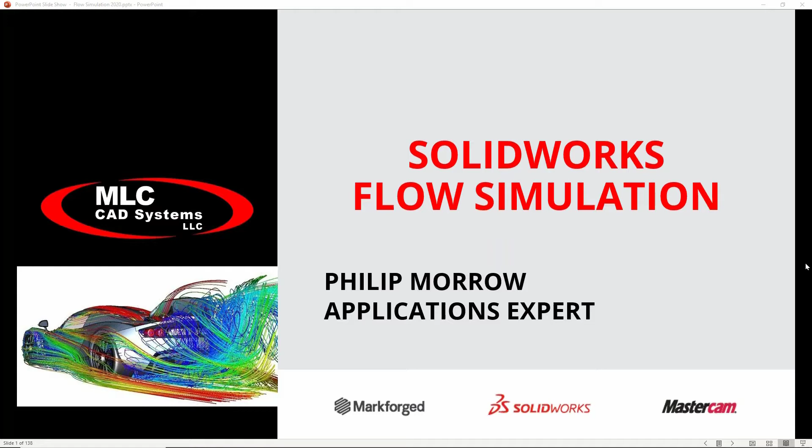I'm going to start off with some introductions for those of you who don't know who I am. If you don't, I hope you would by now, but if not, I hope you get to know me soon. My name's Philip Morrow. I'm an applications expert here at MLC CAD Systems. I've been doing this for a little over 7 years. My background is in mechanical engineering. I worked in the defense contracting industry and in a CNC machine shop before I came over to MLC.

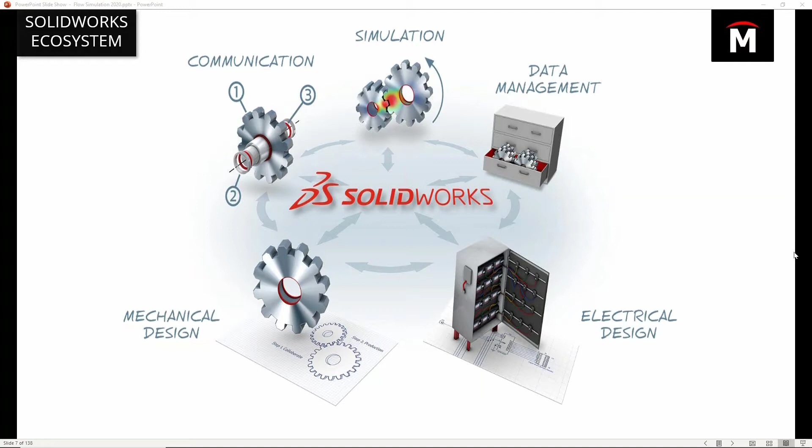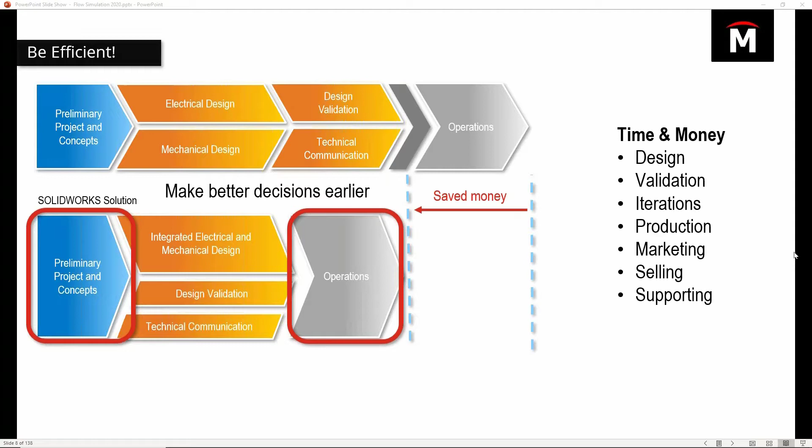It's also built inside of SOLIDWORKS, so it has the same interface. So when you think of a sim product here, or really anything with the SOLIDWORKS brand on it, the idea is to get more of these processes to work in parallel. Not just the data management, the messy multiple files and revisions, but as soon as somebody creates a shape, well, I can start a flow simulation with that geometry. We can use configurations on it if we need to, and so if there's a change in the design, I know it's time to just rerun the flow simulation, and that's what we're talking about.

So let's get to the actual software and what this thing actually is. This is a general purpose computational fluid dynamics tool, or what you're going to see a lot as CFD. Right, and in CFD, we're always coupled with heat transfer. So it's always doing convection heat transfer, even if you don't need it, that's in there.

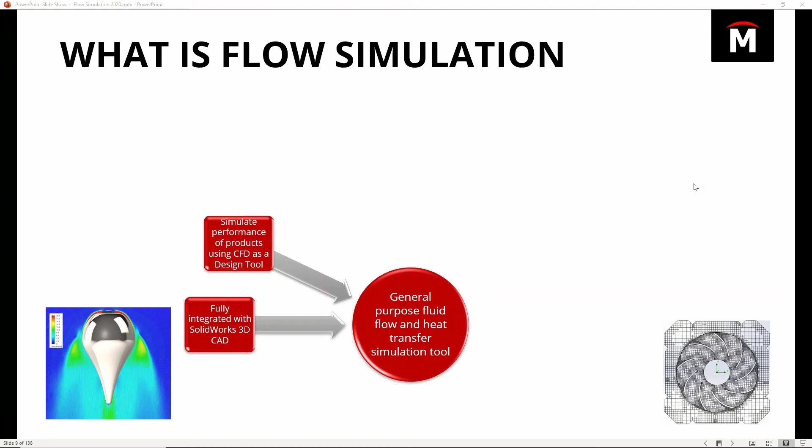And this is built inside of SOLIDWORKS. So you need a SOLIDWORKS license to run this, but it just runs as an add-in with the same interface, the same right-click menus that you're used to. The idea then is you can use this as a design tool. You can use it to simulate performance, optimize performance, and compare designs side by side. That's really where the sweet spot for this is.

It does not matter if you're talking about internal flows, external flows, or both happening at the same time. In fact, you could run compressible and incompressible fluids, even non-Newtonian fluids in here. So your slurries, your bloods, your different materials that act in these strange behaviors, not a problem. This software runs the K epsilon model for turbulence, meaning we don't need to specify where we have laminar flow or where things are transitioning. Really, it can handle all of that by itself.

And I mentioned it was a heat transfer tool for some different reasons I'm going to talk about. Flow simulation, or CFD, computational fluid dynamics, is the best place to do heat transfer solutions, whether that's conduction, radiation, or just convection, which is always being solved. And for those of you who know SOLIDWORKS Simulation, without the word flow in there, that's our finite element analysis, our stress and deflection software that's also built in. These two products work together, they're coupled.

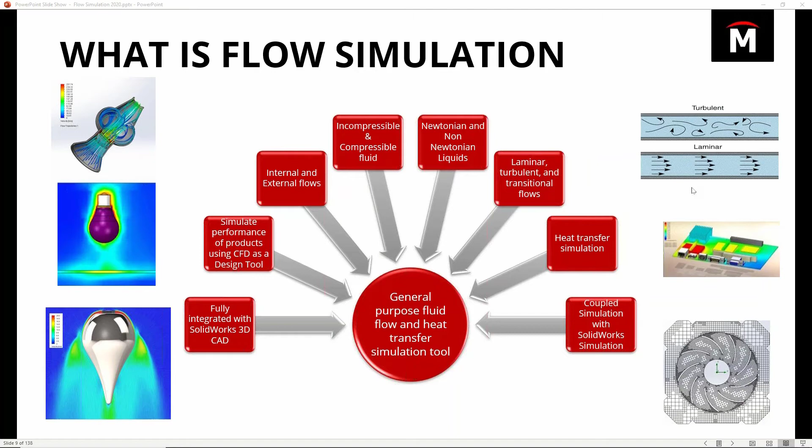So let's say you run a flow simulation and you've determined a pressure distribution on something outside in the wind, or a temperature distribution, and things are going to expand as they heat up. Well, you can take those results and use them as an input over in SOLIDWORKS Simulation and calculate those deflections due to the wind loading and those stresses due to thermal expansion. So as you'd expect, the tools work together.

This also means over the 7 years I've been here, I've seen them in a lot of applications, and I've seen the product grow. You guys know SOLIDWORKS, every major release comes out with 250 enhancements just to CAD. Well, this stuff happens with Sim as well. The release is a little later, so you might have missed some of these really cool capabilities that came in, because they actually show up usually around the February timeframe.

One of them you definitely should know about is optimization. Whether that's just a what-if side-by-side comparison or like a multivariable design of experiments, you can use this software to optimize towards a goal. Let's say, what length of pipe do I need to achieve this pressure drop? Well, we can have the software figure that out for us.

You can also do solution adaptive meshing here. That's the ability to pause the solve and have the software increase the mesh density in areas where there's high rates of change and high gradients, basically just giving you a more accurate solution and a more efficient mesh. It's really something you couldn't do manually, something you want the software to do for you.

Additionally, a sliding mesh capability has come in. This is perfect for rotating geometries, to actually spin those mesh cells, which are representing impellers and fan blades and wind turbine blades. And another really cool one, you definitely see this across our YouTube channel a bit, free surface. That's the interface between two fluids that can't mix. So we're talking oil and water, water and air. You want to see waves sloshing on top of a tank, that can definitely be done in here as a transient time-dependent study.

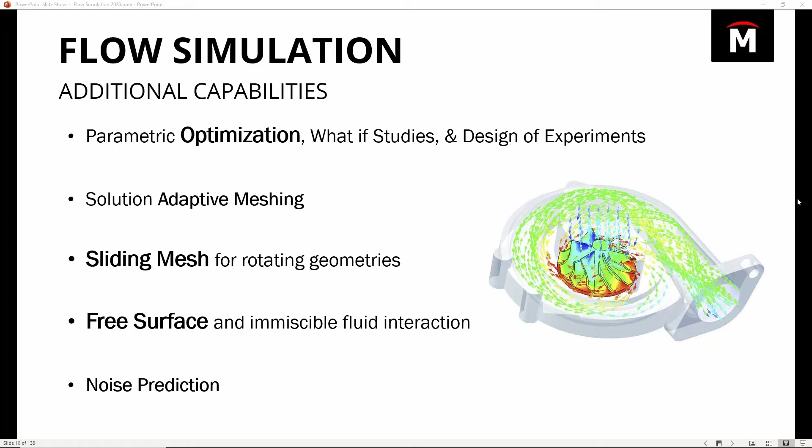Finally, we're doing pressure plots as well. So of course you can do noise prediction in decibels. Pretty cool if you're doing something like a Flowmaster exhaust, or how about a suppressor? Great place to design those types of things. So yeah, the use of this software is far and wide, right?

When I think, okay, I'm going to show today some flow simulation, some hands-on with the software, I'm thinking, okay, what do I want to show you guys? This could just be pressure chambers. It could be spinning and rotating things like the hairdryer model. It could be lighting applications, especially for high temp things like radiation, halogen lights, or just LED housings, or air conditioners, and we're running like humidity models and figuring out comfort parameters.

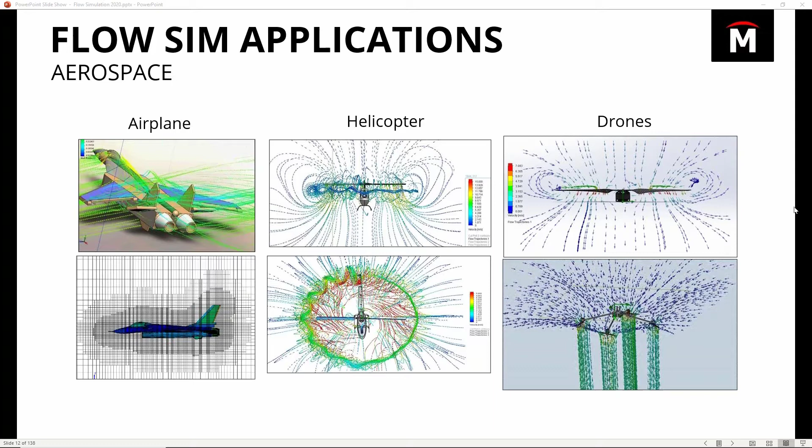Really, the origins of this code, when it first started to be written back in the late 80s, this was for rocket nozzle design. For high Mach number flow was the original stuff. So drag forces, boundary layer skin effects, aircraft design is a perfect place to be. And that kind of goes into automotive stuff. Of course, drag forces for race cars.

We have NASCAR teams, the US bobsled team that uses this program. Sloshing inside of a diesel tank, which you could see on our YouTube channel. Or those comfort parameters I mentioned again to figure out how effective could your HVAC system be. And then there's some niche things as well. Porous media effects could be used for air filtration systems, catalytic converters, or figuring out exhaust manifolds as well.

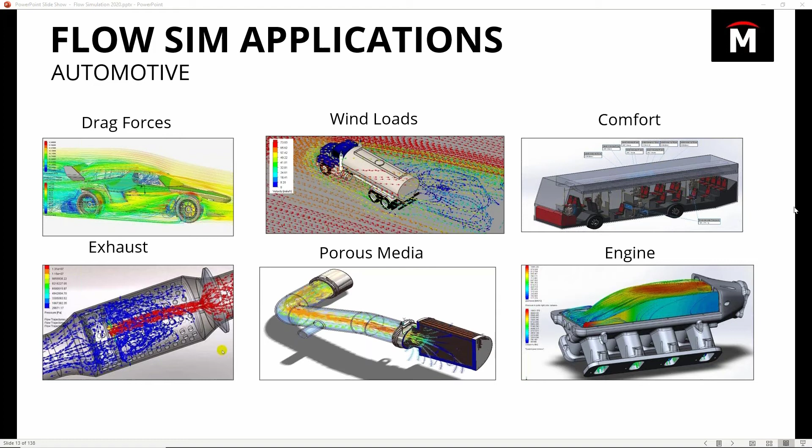So I've got a lot of stuff to choose from when I get to talk about flow simulation. It's like the coolest simulation software that SOLIDWORKS puts out, I think, because it's so far-reaching and the visuals that come out of it are just awesome. So I'll tell you why I see it used most in my area, and our customers that are here in Austin, Texas. And the first one is just figuring out the airflow dynamics, which are often counterintuitive or have some kind of physical phenomena like the Coanda effect or something going on that we wouldn't have guessed if we just built it and prototyped it.

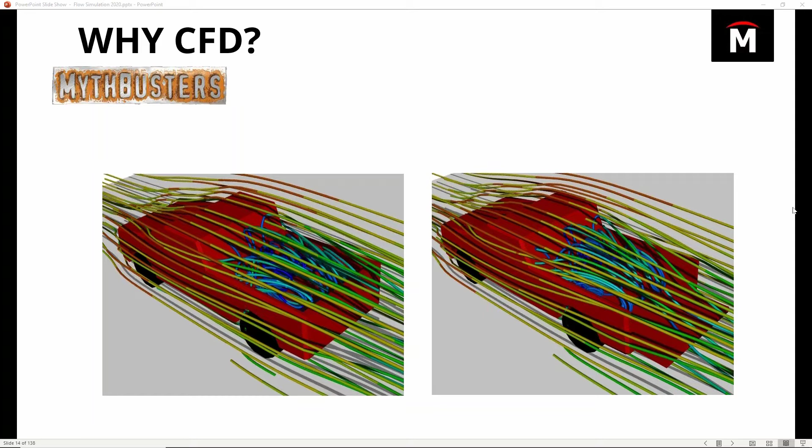A common example I use is the old, is my truck going to be more fuel efficient on the highway if I've got the tailgate up or tailgate down? To me, it feels like the tailgate down would be the way to go. We maybe have less drag than that vertical tailgate back there. But really, it's not the case. It's the opposite.

What you find out when you run this in Flow Sim or in a wind tunnel is that you get a stagnation of vortexing air in the bed of the truck. This works as what's called a virtual body. Because it just sits there, it allows the rest of the air to flow over that virtual body and just stream over the top, basically reducing the drag force. Sometimes stuff like this happens, even inducing turbulence. The bumps on a golf ball can be counterintuitive. So definitely the first reason I see this used.

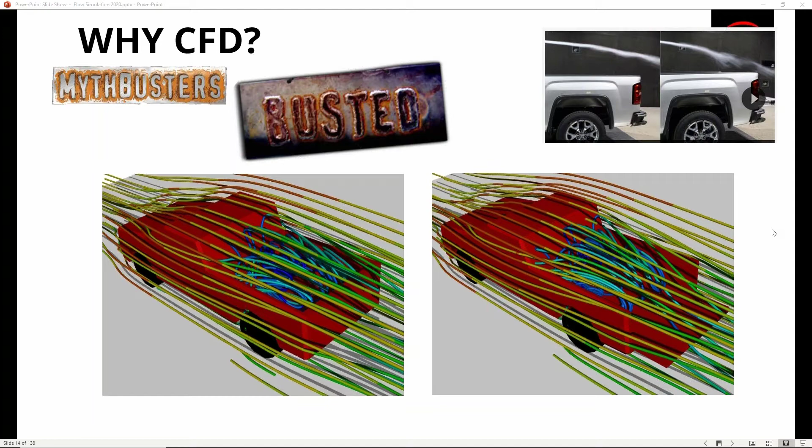But the second big one is thermal analysis. This could be for large industrial applications, but I see it a lot in tiny electronic devices that maybe have forced convection, maybe have free convection, but have a lot of little components that are heating up that would be difficult to mesh in a traditional finite element analysis program.

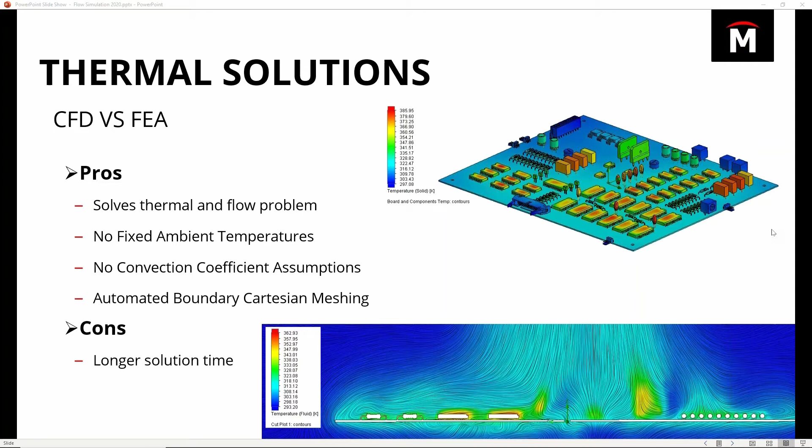And because we don't have to make the same assumptions over in flow simulation, we don't have to have fixed ambient temperatures. We don't tell it the rates of convection. It calculates these things. But the only downside maybe is that the solves are a little bit longer because we're getting more information out of it. So with those two ideas in mind, I thought I would show you guys today two different scenarios. I know I'm talking a little fast because I want to show you both of these.

The first would be an exhaust recirculation. Sometimes you see these called preheaters, right? We take exhaust off of one thing, bleed it into the incoming air of another. And of course, it's really important that that exhaust comes in evenly mixed since you're kind of polluting the air downstream just to warm it up. So we want to see, could we make some changes to this design, or how good is it at mixing in that hot exhaust into a new stream of air?

And then, of course, electronics cooling. I've got a model here that uses just free convection, some heat generated by LEDs, and just take a look at one way that we might solve that using external analysis in the software. So those are my two thoughts for today. Let's start first with the exhaust recirculation manifold.

This one has just a few components, and I can show you completely the setup of it because that's the first step here, right? Let's just take our CAD model and set up the experiment that we're going with on the exact same model. You can make another configuration if you need to, but you could just work in the same assembly that you've got right now. With flow simulation, there is little to no need to do a bunch of geometry simplification. You can just get going. So here's the product I'm gonna work with here.

What I've got is on the right side, just open to the atmosphere, and on the left side I've got inside of this gray component an exhaust gas coming in hot, and I know the mass flow rate of it. On the bottom left side of this gold component, I've got air coming in at 40 degrees C, a little warm, and I know the mass flow rate of that as well.

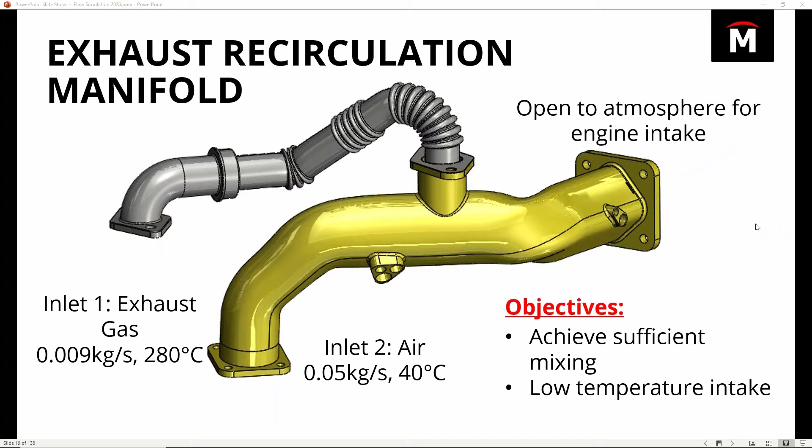So I want to achieve some sufficient mixing here and see what these temperatures are going to be at the exit as well. Now, I do this in Flow Simulation with a wizard. This is the only software where I use a wizard every time. I know the software well, and I still use the wizard every time. So let's flip over and I'll show you what this looks like.

Here in SOLIDWORKS, I've got my assembly open. It's just a regular assembly you deal with. The only difference here is that I've made the assembly semi-transparent, and I've actually capped off the openings. I did this to make an internal flow. There's some Flow Sim tools to automate lid creation—click a face, and I've got those things capped off, ready to start a flow simulation.

Now, you guys see already that the interface is the same, right? I've got a command manager on top, and I've got a Flow Simulation tab. It is added into the software, and I'm just going to launch the wizard straight off of that.

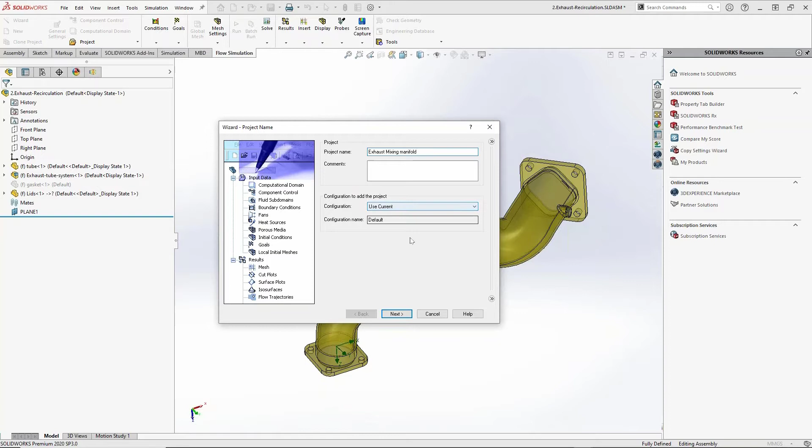So the wizard will help me set up this project. I can give it a name like exhaust mixing manifold. I'm going to use just the current configuration, but these are configuration specific, which is very handy. Then I'll pick a system of units—you're going to find anything you want here. I'm just going to change the temperature to Celsius, and of course you can save this so you never have to do that twice.

Now let's set this thing up a little bit. This is an internal analysis. I don't have any hollow cavities in there, so really I just need that. I'm not going to do heat conduction this time, but here's where I'm turning on more equations for the solver. The less things I check, the faster it'll solve. This thing is dominated by flow—gravity is not even going to be that important because we don't have natural convection.

So really, I'm just going to run internal analysis. I know convection and all my flow velocities and pressures are solved. So that's it, I'll just hit next.

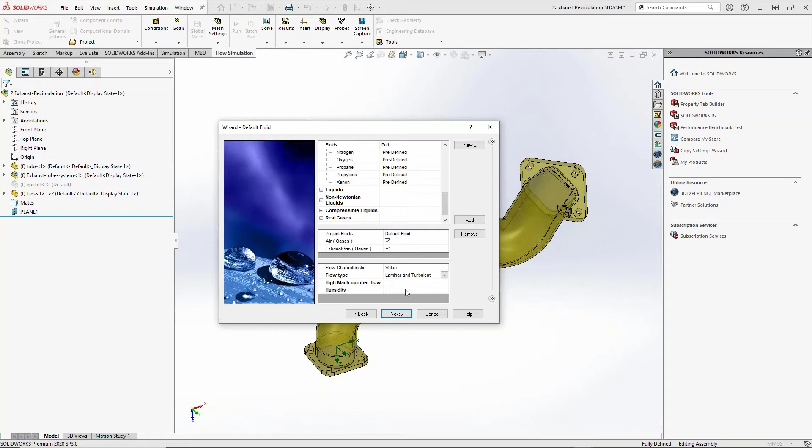Now, depending on what I chose there, I need to tell it what the defaults are—what's everything going to start with? I've got air in this analysis, so I'll open gases and add air. I've also added another gas of my own here to represent exhaust. You can add any custom materials you want. So these two fluids are going to be in my project, and I'm adding both of those. Because I chose gases, I've got some extra options if I needed them, like running a humidity model or high Mach number flows, but I don't need to add those equations here, so I'll just hit next again.

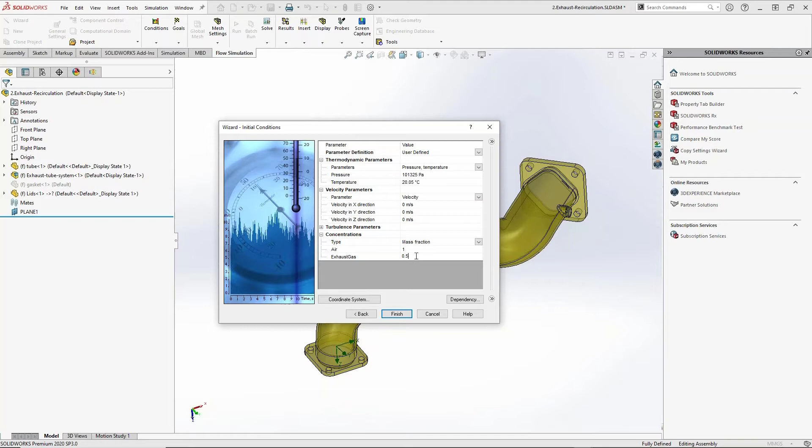Default wall conditions make sense to me—the only way heat's getting in or out is by the entrance and exit that I tell it. We have a no-slip at the wall assumption. You'll notice I'm not making many changes in this wizard, am I? The only thing you really need to know is to answer the questions for what you need, and everything here becomes the default for your initial conditions. For instance, I've got a concentration section—let's say, hey, initially everything is 100% air, unless I tell it otherwise. That'll become the default, and I'll just hit finish.

All right, so that wizard, I use it every time. You add the things you want to know about and what's going to be in here as an overall default, and then you've got some starting conditions to deal with. Pretty simple—I never skip it.

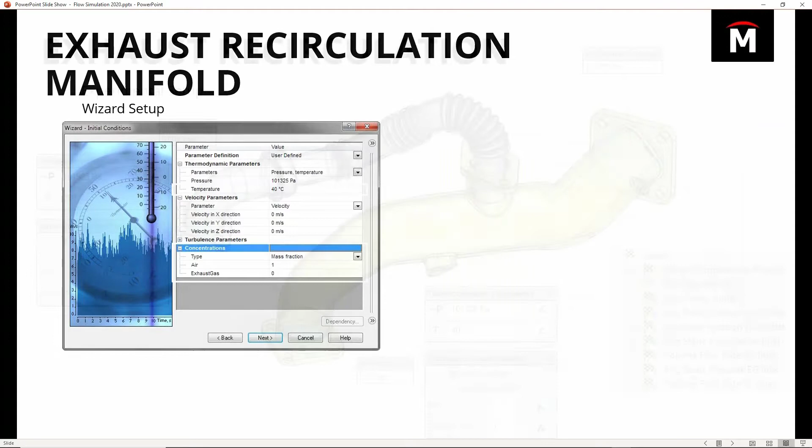But now we get to the individual stuff. Now we need to go around and tell it what are my ins and outs and what's different from the wizard. For instance, I know I've got an inlet mass flow here of 0.009 kilograms per second at 280 C. How do we set that up? Well, Flow Simulation made a new tree—here it is.

It's got my exhaust mixing manifold, got my simulation set up. If you use SOLIDWORKS, you definitely know how to use trees. It also created a computational domain for me, that's that cube you see. So it recognized the volume that I'm working in. I could use this to specify some symmetry if I needed to, but I'm just going to hide it because it looks good.

My ins and outs are what's called boundary conditions. So I'm going to insert a boundary condition, and I'm simply going to choose the inlet face. Here I'm going to use a quick select other to get the inside face of that lid that I made, because what I know is an inlet mass flow rate of 0.009.

And then there's a lot of other buttons and things in here, a whole bunch of stuff. I mean, I could go to the help file and read what all this stuff is, but all this stuff is just going to be as I said it was in the wizard.

So I said everything was air. If I expand substance concentrations, it says this is 100% air. Well, I'm going to switch that so it's 100% exhaust. And if I look at the thermodynamic parameters, it's the room temperature that I left in the wizard. I'm going to make that 280 degrees C.

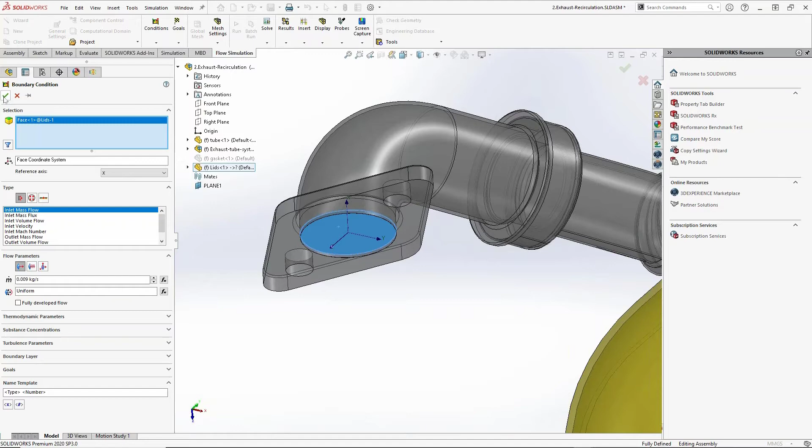So if you forget something, if you don't know what to put down here, don't worry about it. It's just going to be what was in the wizard. And then one green check, and I've got my inlet.

Similar thing is happening over here with air. If I quickly flip back to our experimental setup, looks like I've got air coming in at 40 degrees C and 0.05. So I'm going to insert another mass flow rate coming in, 0.05.

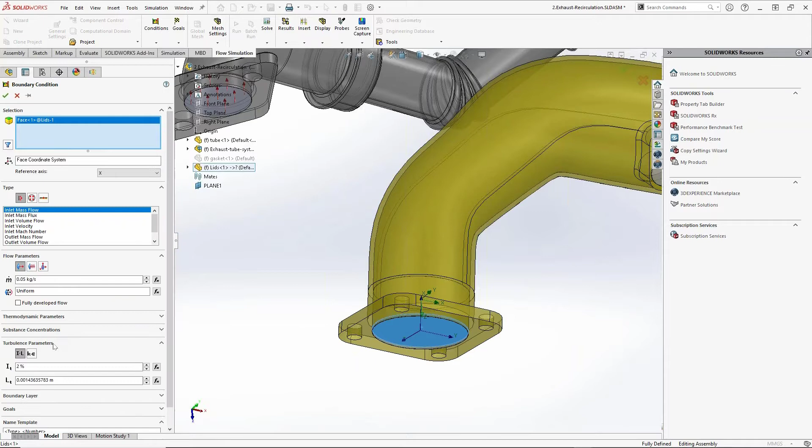I'll just grab the face that air comes into the system at. And really, I don't need to change the substance concentrations, anything else here. I can make it a little warmer, it comes in at 40 degrees C.

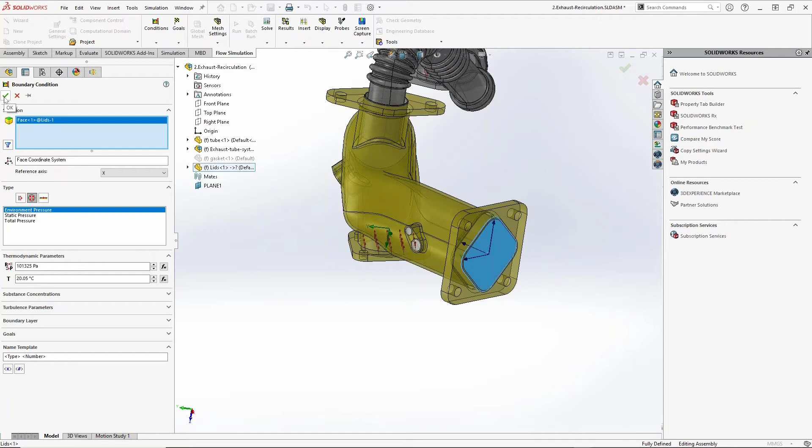All right, that's pretty good. And how about the outlet? That one's probably the easiest boundary condition, because now instead of a known inlet flow rate or an inlet velocity, I can just say this is a pressure opening. This is just open to the environment. So it's just going to spill out into air that's at 1 atmosphere and room temp. So that's my exit over there. Not too complex to figure out the ins and outs of this entire system.

Now there's one thing over here in my experimental setup on the right that I could skip, but you really shouldn't. These are goals. What are you looking for in this? By specifying goals, you're going to get those outlet numbers just delivered to you. So it's great for post-processing, but it also helps us check the accuracy, right? We got a garbage in, garbage out scenario. I want to make sure that the numbers coming out are what I expected, that I set things up right.

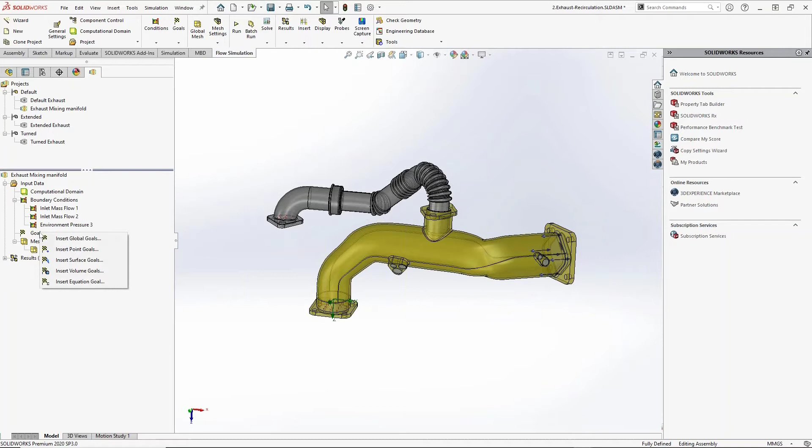So I'm just going to right click on goals. You can do these per body, per specific surface. Maybe I'll just say globally, let's find out here. And you get a whole list of stuff you can use. Let's say globally, I want to know what the average fluid temperature is. And I'm just going to create that goal.

So that'll be monitored during the solver. The solver will know that's something it needs to be particularly accurate about. Plus, I get the hard numbers out as a result from this thing, which is going to be super nice.

At this point, I'm actually ready to run this thing. I went through the wizard. I specified how things come in and out of my model. I set up a goal that I'm interested in. There is a section here on meshing, but honestly, this is very simple geometry.

A couple tubes, they don't change much in diameter. The mesh it comes out with is going to be fine. And if you're really interested in the details of meshing too, well, that's what we spend about half our training class over. So definitely let us know about that.

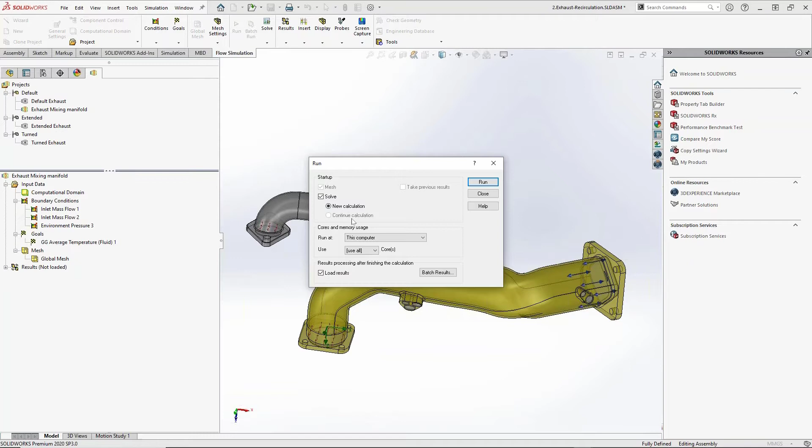One thing I want to point out is if I run this right now, I can leave a couple of CPUs open on my computer to do other things with. And I can pick up old calculations and continue ones that I stopped and left off. So I mentioned that when you're running one of these, it might take a little longer than FEA. Well, that's okay.

You can actually pause one of these and come back to it later. You could leave yourself some CPU available, so you can go on Google Chrome, whatever you need during the day. You can even offload this to a slave computer and just have it run on your coworker's machine, and they can wonder why their CPU is running so hard. So, I mean, that's simply it.

Set up an experiment using the wizard, your ins and outs, and hit run. You guys all know how to use a tree, and you know how to use that right-click button inside of SOLIDWORKS.

You're going to be able to get one of these running. In fact, I did something here that you really don't see done in web demonstrations of software. I actually hit run on this model so that it's cranking up right now, and it's loading all those things that I set up into these big math equations, preparing that. Then it's going to mesh the model, break it down to those cells, and start solving.

The reason I hit run and decided to do that here live is because I wanted you guys to see this solver window. Everyone kind of knows that flow sims, CFDs take a little longer to run, but I'm just running this on my Lenovo laptop.

And I've already mentioned that you could save yourself some CPUs, or you could stop one of these and pick it up later. But you also get real-time feedback as you're solving these things. So what if your setup was a lot more complicated?

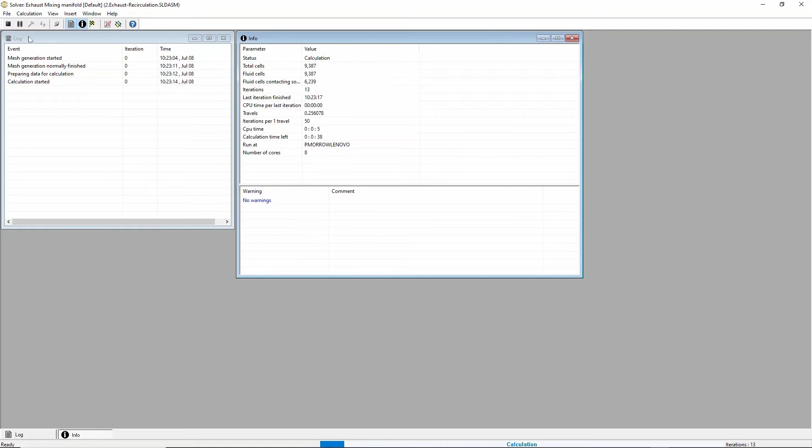Well, in something like this, it's already solving here. I'm actually going to pause it. I can see what's going on with the solving. Do I have any warnings I should know about? I could monitor that average temperature that I set up as a goal. I can see it's increasing.

And I could even watch cut plots of this model. So I could say, let's just pick a plane and watch, let's watch velocity, sure. And you can see there's my plane just kind of cuts through it in 3 different spots.

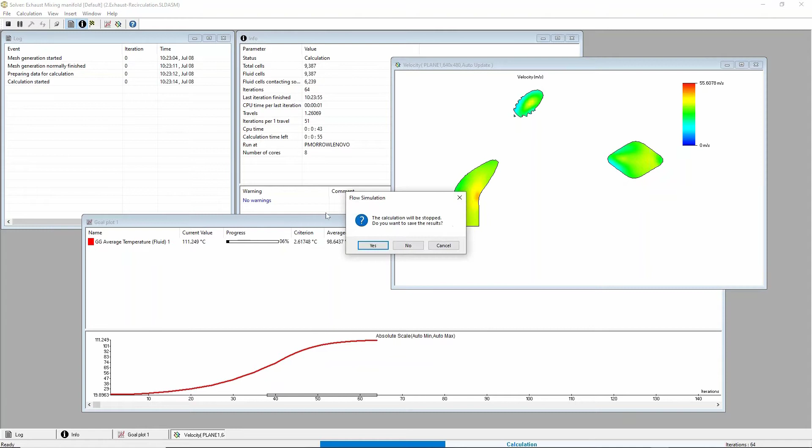And so if I unpause this, I can see things change from where they were at my initially all air-filled room temperature to as this flow starts to develop. So if you get something that goes the wrong direction, okay, I must have set something up wrong. I can go ahead and stop this and just go back in and make a change in the software and pick right back up from where I left off.

So don't worry about these long solve times. It's really a misnomer. You're going to get results out of it right away. Even while it's solving, I'm making cut plots. I can save animations of those, and I can get qualitative and quantitative results out of it.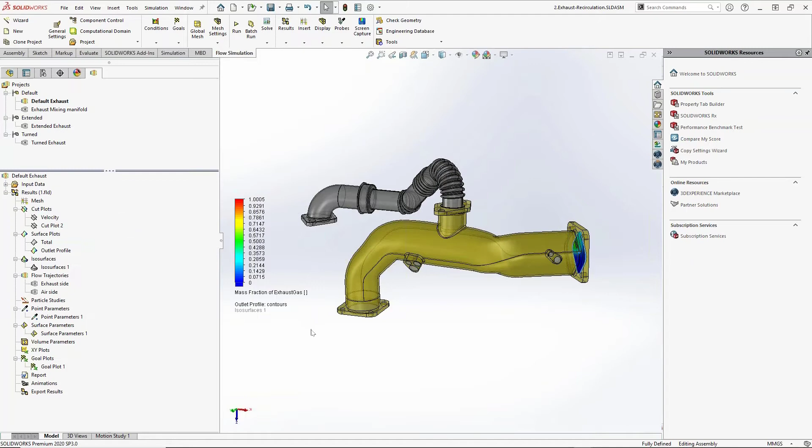Here I've got a surface plot showing the outlet profile by mass fraction of exhaust gas. And this is actually telling already. Even though we're qualitative, what I can see here is I've got a high mass fraction of exhaust gas just sitting on one side. So not very evenly distributed.

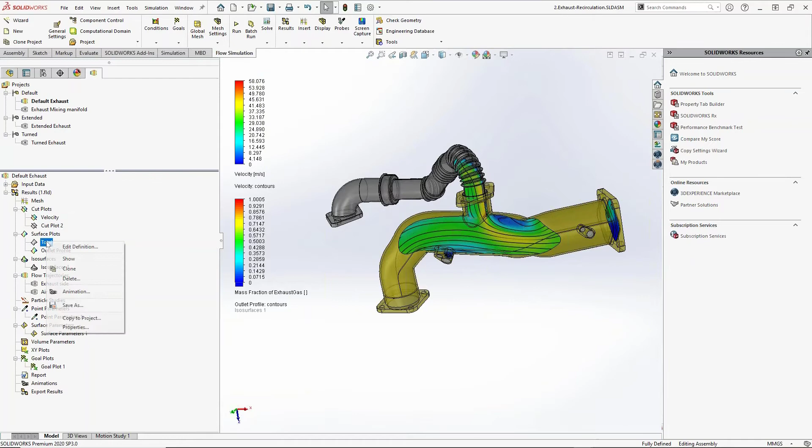I'm a big fan of moving through cut plots and surface plots first to really learn about what the flow behavior is. You're not going to miss anything here. And I can see, okay, my velocity's out here on the surface, and where I've got my mass distribution. How evenly is it flowing?

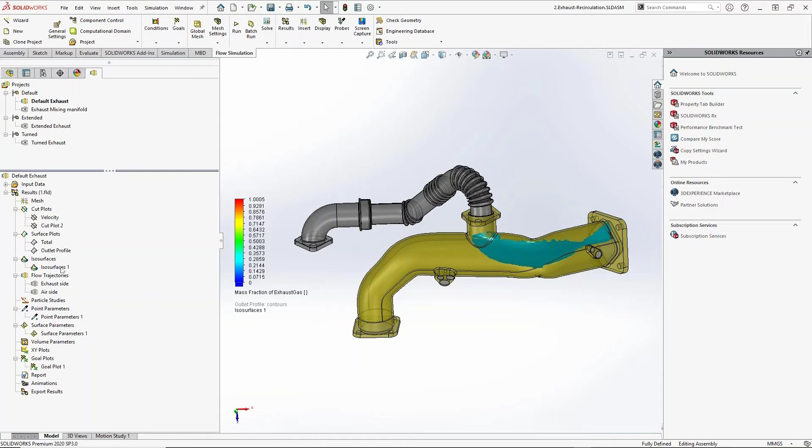After you go through some of these qualitative things just to learn about them, make sure you kind of understand that this is working the way you intended, and if there's any phenomena you didn't realize, then maybe set up some flow trajectories. Flow trajectories are a super cool way to explain the flow to other people.

And these have great animations where we can simply pick a face and say, hey, I want some arrows to move through this thing, maybe color them by mass fraction of exhaust gas as they are here. They're always going to move with the respective velocity, and they just make great animations that if you show them to anyone outside of engineering, they're immediately going to understand what this really means.

Of course, once you get through there, it's time for the hard data, right? To actually get some numbers out of here. And that's where the second half of this result tree comes in, where you start dealing with goal plots and volume parameters. I'm actually going to jump straight to a goal plot.

So I mentioned if you set up those goals earlier, you could see them immediately in Flow Simulation. Well, here, let's take a look at all the different goals. We're looking at mass fractions of air at the inlets and outlets. We're looking at a global goal for average temperature of the fluid. And if I just hit show, all these numbers show up right down here, so I can see what the answers are right away.

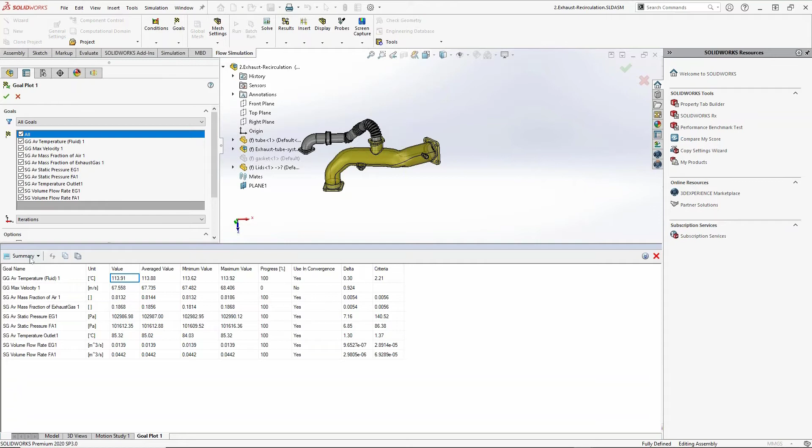I can see that average fluid temperature is above boiling point right here, and I can check out what their deviation is. You could also check out their convergence graph. So as this thing solved, was it still bouncing around, or did it converge and get me a good output given my input?

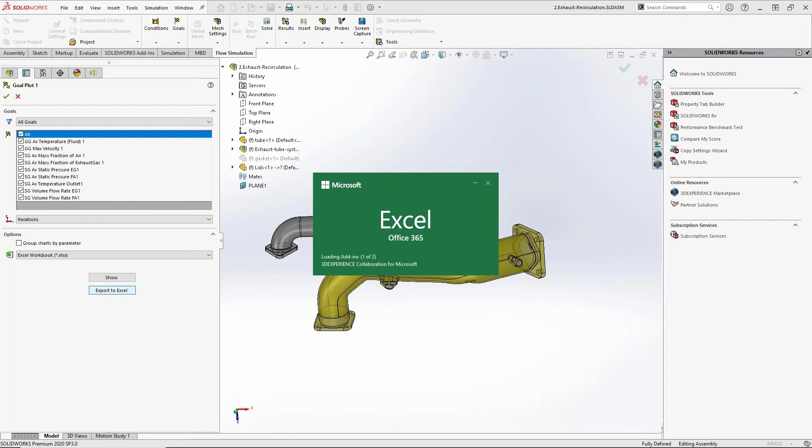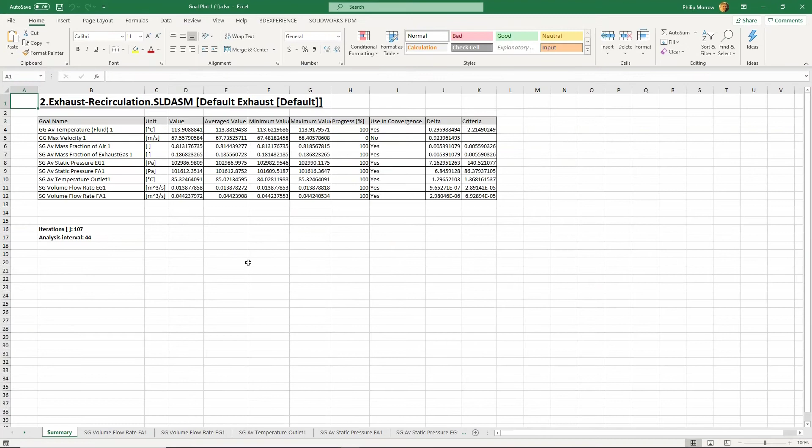So I get a nice sanity check on the efficiency and accuracy of my setup, plus I get the hard numbers. In fact, when it comes to hard numbers, if you just hit export to Excel, this takes a couple of seconds, and you're going to get all the hard data output to Microsoft Excel. Here it popped up for me. I've got that same table with more decimal places, plus all those nice convergence graph plots. And of course, if you go all the way down, you've got the hard data.

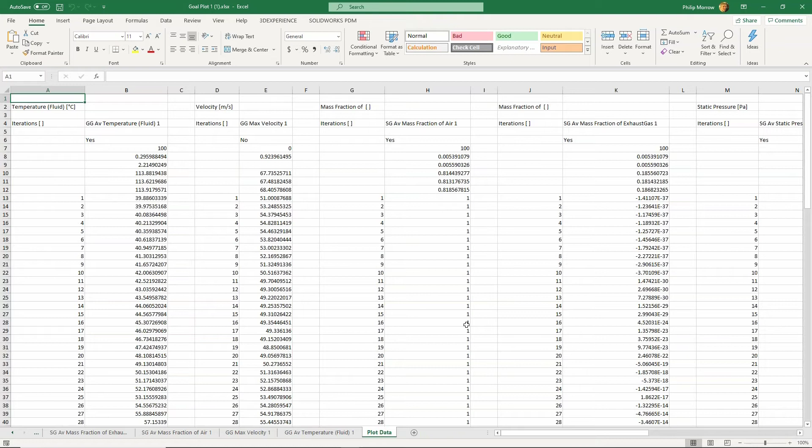So if you want to do some more unique visualization, it can be really nice for transient, time-dependent stuff. You've got that as well. There's even an animation suite down here at the bottom.

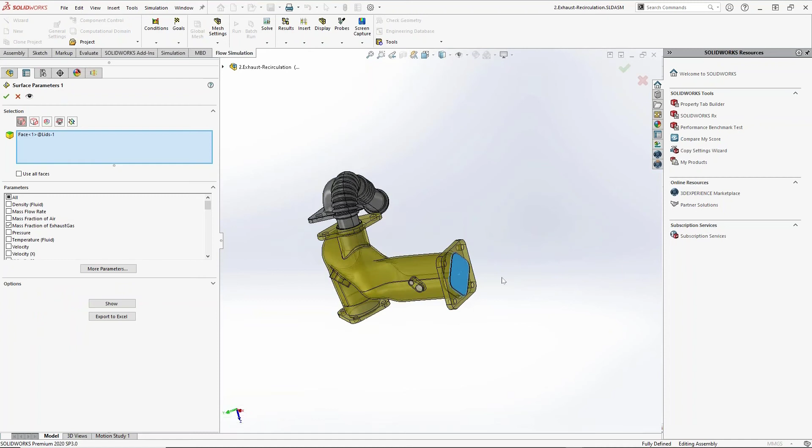Now, if you forgot to make some goals, don't worry too much either. That's where these point, surface, and volume parameters come in. For instance, here's a surface parameter that's looking for the mass fraction of exhaust at the outlet surface. We can do this for anything even if we didn't set up a goal. You can do it for surfaces like that, for entire bodies, or one that I really like is point parameters. I can say evenly space 20 different points on a face and give me the value at each one of those points so I can compare what's their average, what's their standard deviation, and I can see all those hard numbers for each one of those data points.

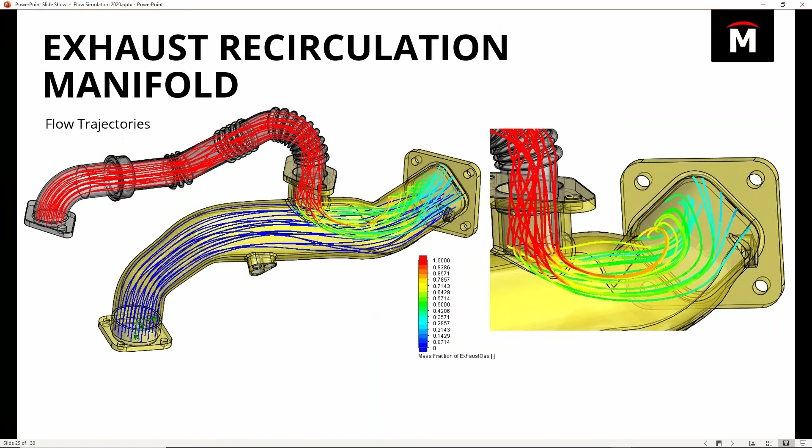So qualitatively, quantitatively, it's all here. It's in a tree that I generally just work from top to bottom. Of course, all this can be saved out in a nice report, but I've just taken some screenshots here to show you the different behaviors.

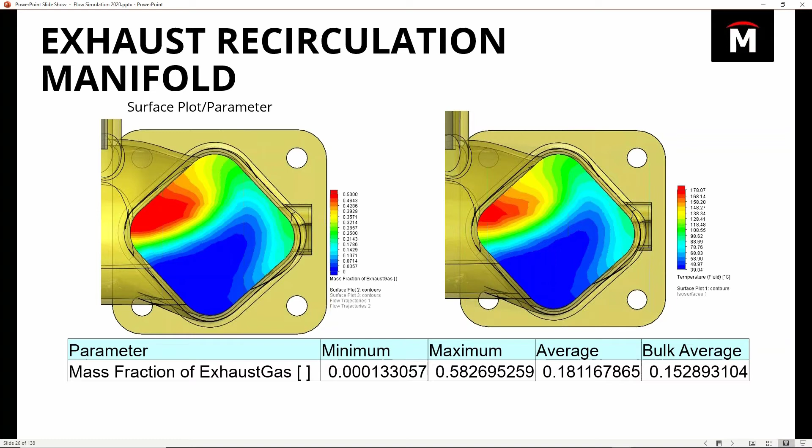Here I've got flow trajectories using pipes, and we can see that mass fraction, just like you saw in the surface plot, it's really kind of just on one side, this exhaust gas. It's not great. If I average out some of these point parameters, I see, yeah, there's a lot of exhaust gas at one side of the exit, and there's a lot of air on the other side. There's not very even mixing.

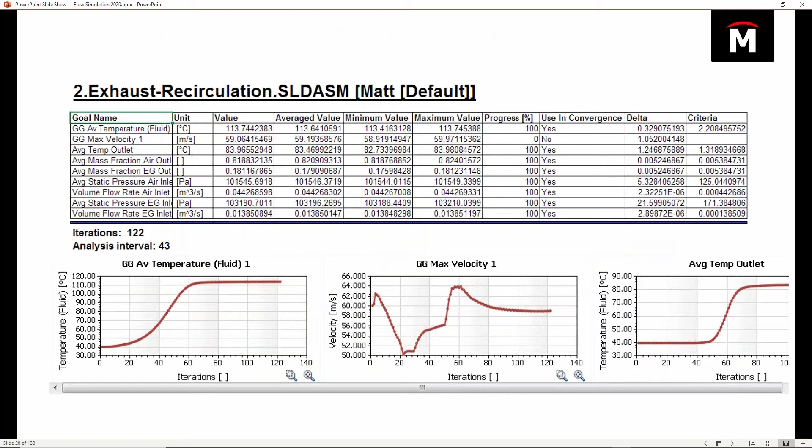That shows up in the numbers when I look at those points, when I compare their standard deviation. And when I look at the hard goals as well, I can see, okay, maybe there's something we could do to improve this design. That's always the question, right? Okay, we know where we're at now. How do we improve this thing? Is there something we could optimize? Maybe we know we could change the diameter of something.

Well, in this case, I'm thinking, let's just try some different pipe designs, because we could say what we've got now, we could extend that lower into the stream of incoming air, so it's right in the center of it. Or we could even turn it, which seems to me like it would probably work best. We turn it, and then it's really already heading the right direction, and it's in the middle of the stream of air.

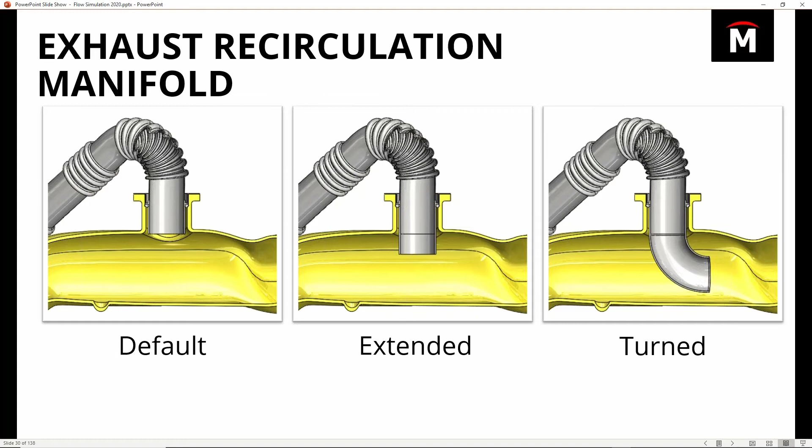That's probably a great way to go. Well, I mentioned these were configuration specific, right? And just like I said on units as well, if you do something twice in SOLIDWORKS, that's a great reason to call us on tech support, because I guarantee there's a way to do it once. And this is the same thing here. I simply clone a study and turn it into another one.

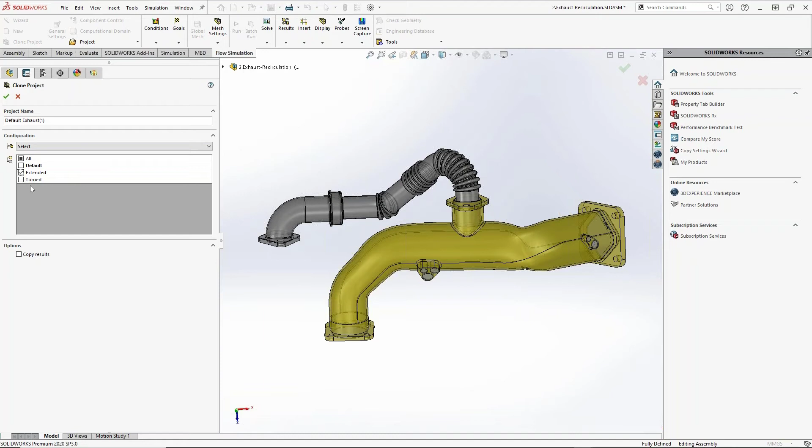What that looks like in the software is simply right-clicking on a study and hitting clone. This is also how you start that goal optimization. But just right-click and hit clone. I can give it a new name, and I can pick which configuration I'm trying to clone it to. So that's what I've done. When you see here under these configurations, I've got my default, my extended, and my turned exhaust on here. So we can compare them side by side.

When you clone, not only does it have the exact same setup, it's got the same plot outputs ready to go as soon as that's run. Now, if you do a lot of the same geometry, say you're just doing valves all day and you have separate files, you can save this as a full template. But if you're using the same file, just use configurations. It's a super easy way to go.

And of course, when you hit run, we now have a batch run capability. So I can say, run these specific studies, just crank away. I'm going to lunch. We'll come back and compare. And you can do exactly that. When you right-click your results folder and run a comparison, all of those plots you can choose to see side by side. So what I'm showing you here is the results comparison output of the surface plot at the exit. We're looking at mass fraction again of exhaust gas.

So we can see the default one that we started with. We can see just extending that pipe a little bit in the middle. And then the one I thought would be best was extending and turning the pipe into the flow. But I can see here that it actually still creates one concentrated area of exhaust gas. So qualitatively, the most evenly distributed looks to be simply extending that pipe maybe 1 inch down. Not really what I expected.

And of course that turns up in the numbers as well. We want the mass fraction of air and exhaust to be as similar as possible, so basically we want these bars to be the same length if we can. And that's what I'm seeing here with the extended pipe design. This is borne out if we look simply at the goal plots, at the overall range and the mass fraction here. So we can quickly say, okay, I know which pipe design is going to be best now. As a design, I can just add a 1 inch link to this and have markedly better downstream performance.

Now, I hope I just showed you how anybody could use this software, but I just used something with 2 inlets and an outlet, right? But I use the same geometry I'm using in CAD. I use the wizard, I specify my ins and outs, and I run it, and then I just play with the results tree from top to bottom, maybe using our results visualization YouTube video as a template. Not too hard to do.

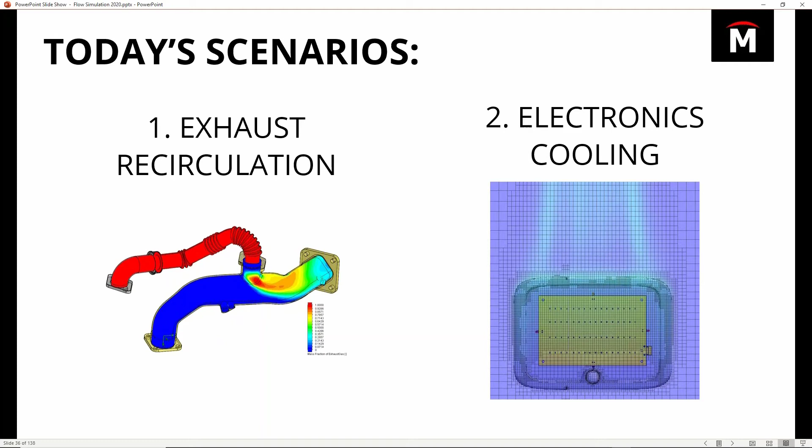Things get a little harder when you start going, well, what if I have 3,000 components here? What if I have an electronic design that has a lot of items on it, or just something that's going to take more clicks to set up? So I want to show you that with this electronics cooling design. Generally, we have a lot more components there, but it's still kind of small scale, so I can show it nicely here in our web demo.

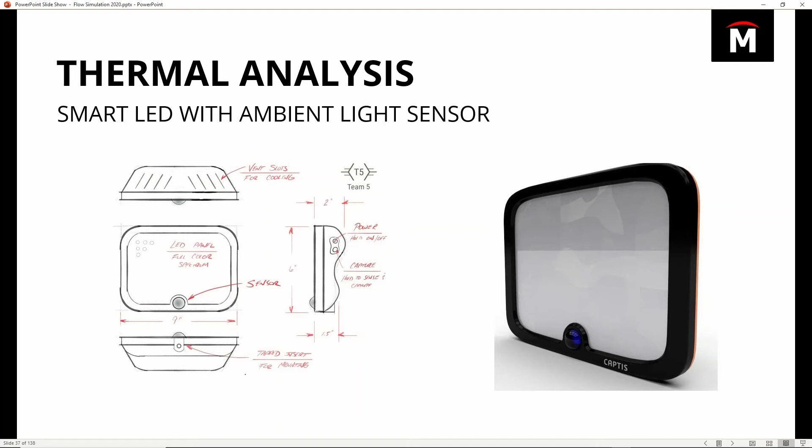And the geometry that I'm working with is a box for a smart LED ambient light sensor, the kind of light that would turn on when you walk into the room, but give you some nice color options, and probably control it like a Philips Hue, who are also guys who use Flow Simulation for their LED thermal analysis. So this started off as an idea, as a napkin sketch. The concept came together first, and actually the industrial design came together first on this one. So I wanted to show you an image of it.

These are a couple screenshots from the program xShape. It's actually not SOLIDWORKS. It's a program that's owned by Dassault Systèmes. It's a cloud-based program on what they call the 3DEXPERIENCE platform. And what you're seeing, why it has a lot of lines and faces in here, is what's called sub-D modeling.

You can use push-pull modeling. It's basically an easy way to make ergonomic industrial design shapes without having to do all the hard, fully defined sketching you might do to parametrically define surface modeling in SOLIDWORKS. So if you're interested in something like that, it is a brand new thing. Get out there on the web and YouTube up xShape on the 3DEXPERIENCE platform.

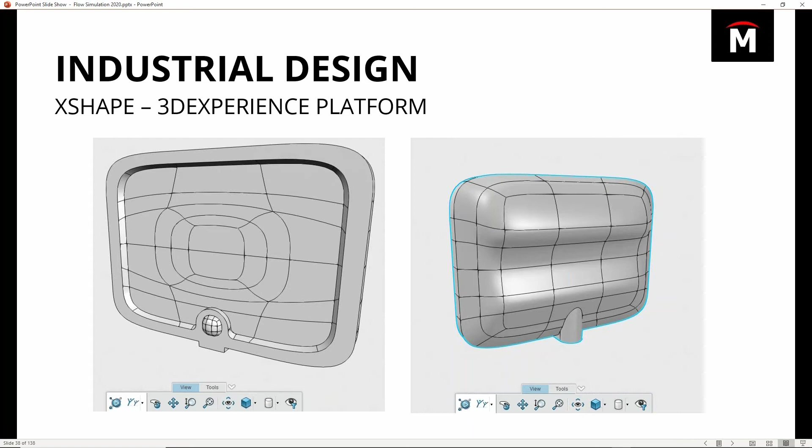That's how the concept art, the first initial design of this was created. And it works with SOLIDWORKS. It's a Dassault Systèmes product, so it comes right from 3DEXPERIENCE into SOLIDWORKS. Just like Flow Sim and everything else, there's nothing SOLIDWORKS related that isn't going to be connected to that single piece of data. So when we bring that down into SOLIDWORKS, now we can get the real work done, not just the art, but we can do the board layout design.

SOLIDWORKS actually has a PCB design program, SOLIDWORKS PCB. And if you're using Altium, this is powered by Altium. You can just buy a SOLIDWORKS PCB connector. So gone are those days of just saving a STEP file and opening it in SOLIDWORKS and designing your housing. These things are bi-directional and they communicate back and forth with the board design team. I'm not a PCB guy though. That work got done for me.

One thing I want to point out, if you have a really large circuit board and you need to get this into Flow Sim, you might be wondering, well, I've got 3,000 components that generate heat. You can automate this as well. A real classic way of doing it is using CircuitWorks in SOLIDWORKS. And CircuitWorks can contain the defined properties from those ECAD files, like the specific heat, the thermal conductivity, on a component level basis in a library of components.

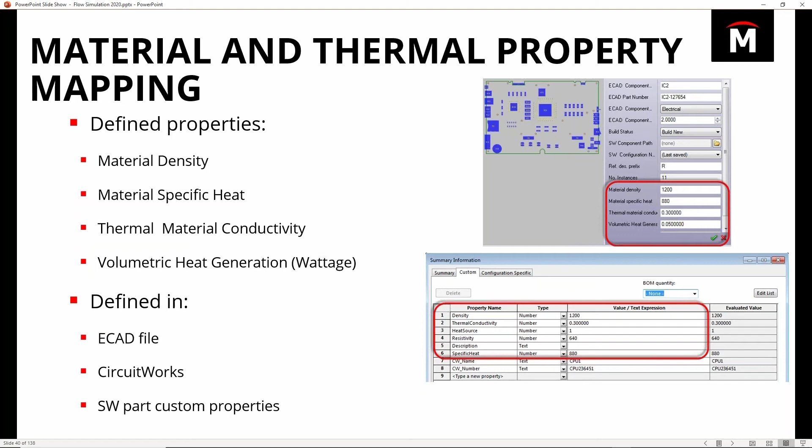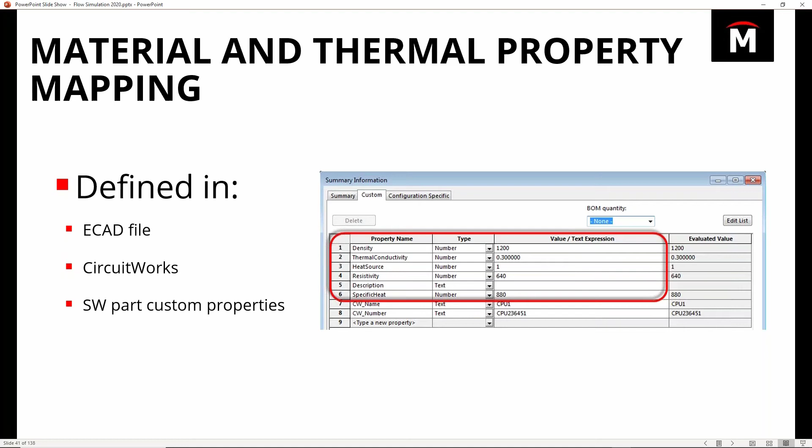What that simply means is when it builds the board in SOLIDWORKS for you, it creates that assembly, it will assign custom properties to those components that have specific names, right? HeatSource, all one word, capital H, capital S. It has specific names that can be read by Flow Simulation. The reason this is really cool is because you don't have to do this stuff manually. Now, you could even do this part manually. You could build your own library and you could give it these custom property names.

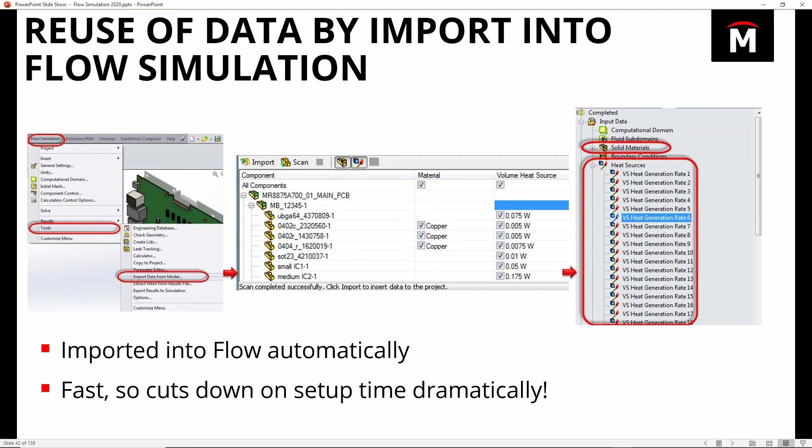But when you get into Flow Simulation, you can simply hit import data from model. This is now going to look over your model. It's going to pick up things like, hey, is there a material in the model? Just a regular SOLIDWORKS material. Bring that in. But it's also going to read those custom properties so it can bring in things like those heat generation rates. I'll show you what I mean.

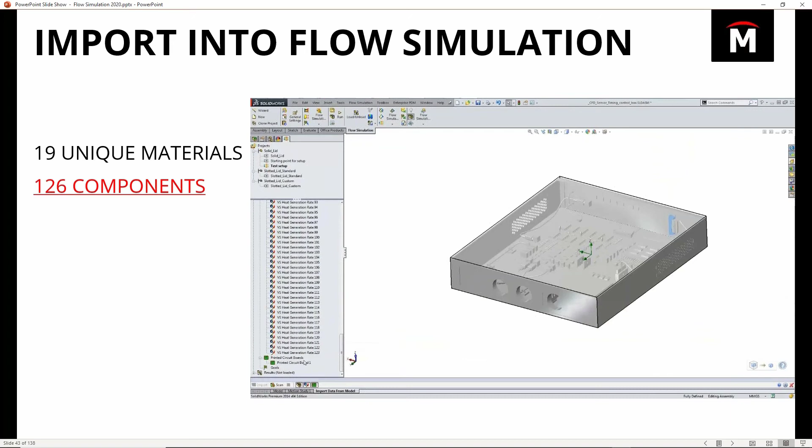It's simply in the drop-down menus under the Flow Simulation tools, or if you right-click in the tree, just about everything's on a right-click. Hit import data from model. It takes a couple of seconds to run through the whole model. You can check the things that you want to bring in, and hit import. In this example, there's 123 different solid bodies generating heat, and they're all imported here in a couple of seconds, as well as a long list of solid materials.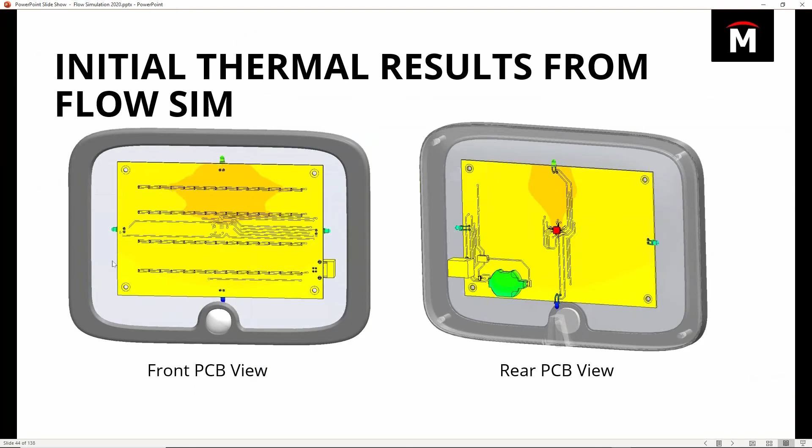But let's flip over and take a look at the rest of this setup, besides just the automation of this setup. So notice here, I've already got this done. I've got a couple different projects as well to try some side-by-side items. But here's my Flow Simulation tree. It's got a few more things in it than my last tree, a few more components. If you ever right-click your tree, you can actually see a long list of all the different things you could stick in a Flow Sim tree. There's a lot of them. It's got a lot of applications.

But luckily, whatever you fill out in the wizard is going to put the appropriate things in the tree for you. In fact, let's take a look at how the setup of this was done in the wizard. So what I'm dealing with here is an external analysis. I'm doing free convection, so I wanted the air around this box as well. But I'm also calculating heat conduction in solids, and I've turned on gravity. If you're doing free convection, you need things to get less dense and to rise, so you probably ought to turn on gravity.

For the fluids here, we're just running air, but I've also turned on a humidity model. I figured it'd be a good idea to do that just because I'm dealing with electronics. Now I've turned on conduction, so I need a default solid. I'm just going to pick one. High impact polystyrene is what I'm using for the default solid. So everything becomes the default from the wizard until I tell it individually in the tree that it's something else, or I import that data from the model.

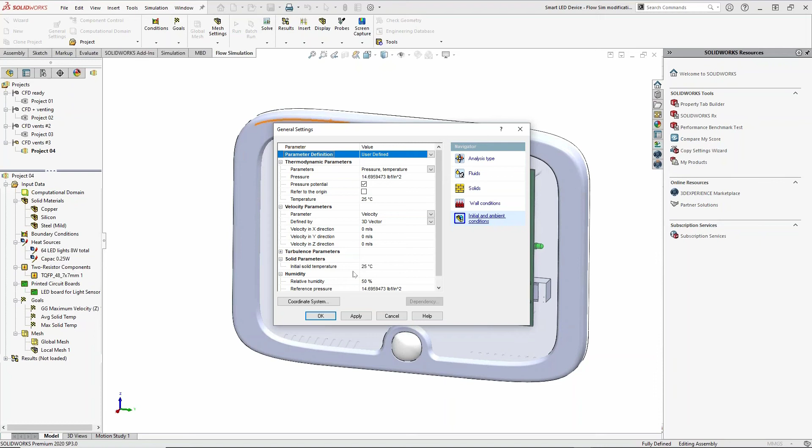Finally, my initial conditions are just room temperature, but I can specify things like an initial humidity and initial temperature for all of these solids. Again, the wizard did all the work for me, so I can just review the tree, ensure that I'm happy with the larger computational domain here, that I'm going to be able to see the heat rising that I want, drag this around to the size you need. I specified a few different solid materials inside of here, some silicon, some steel, some copper, but everything else is going to be this polystyrene thermal material properties unless I tell it otherwise.

Now I kind of skipped boundary conditions because I don't have any ins and outs, right? It's an external analysis, so as things get hot, they should just rise, but I have specified two heat sources. Just solid bodies. This represents each one of the LEDs and a couple of capacitors. Another way that you can deal with LEDs is by treating them as an integrated circuit. So you can calculate a junction and a board temperature.

This requires an electronics cooling module add-on I'll talk about later, but this is what it looks like, a 2-resistor component. There's a lot of built-in integrated circuit chips we can choose from out of the database that Flow Simulation comes with. It's a nice, accurate way to deal with those. Similarly, the same thing comes with a PCB. I could have said this is just simply a piece of FR4 board, but when you're dealing with fans, integrated circuits, 2-resistor components, there is a huge database to provide more detailed information about this stuff. That's where I'm grabbing materials. That's where I'm grabbing these things.

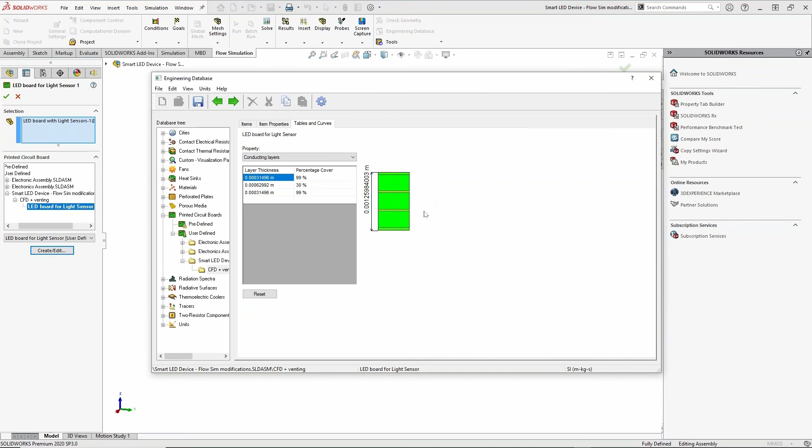And you can see here I've got a more accurate representation of my PCB and the percentage of copper covering each layer. In fact, if you wanted to go all the way up there, using something like SOLIDWORKS PCB, which will actually model you those traces if you wanted to, you could then apply Joule heating and figure out how much the copper is going to heat up with currents flowing through it. But I figured that was overkill here. I just need a PCB. I need some stuff that's generating heat, and I need some goals.

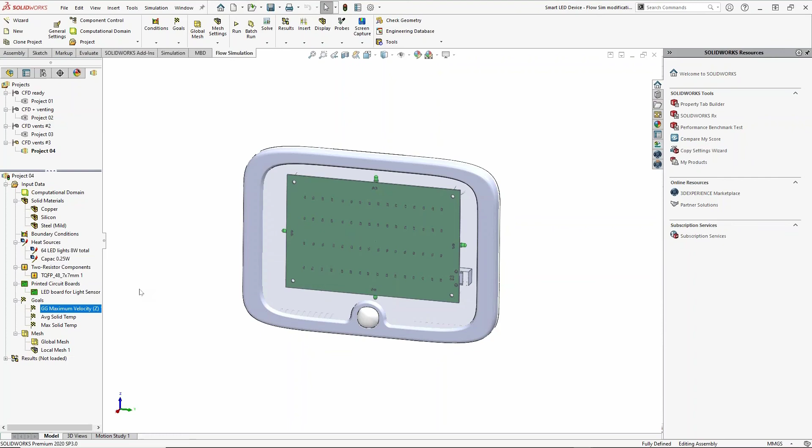What am I looking for here? The average and max solid temperature. And I wanted to know globally what's the max velocity that I get out of this thing just from the heat causing air to rise. Now, in the initial setup of this, there's actually no vents. I just wanted to know how hot does this thing get? And it didn't get crazy hot.

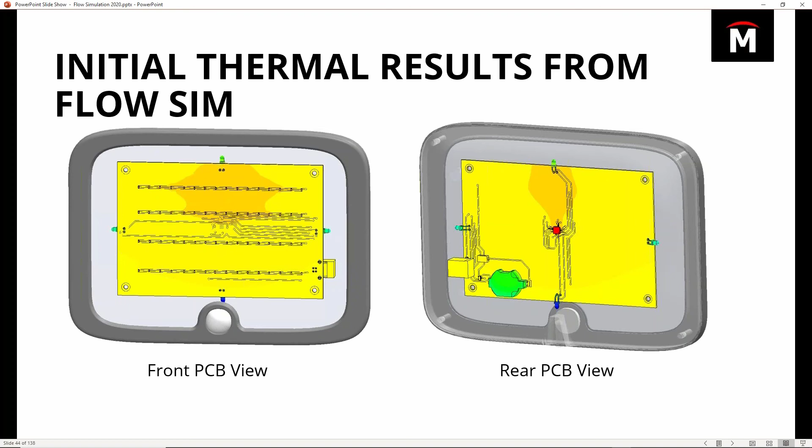It would probably still function as long as you didn't take it outside in Texas at any point in the day right now. It'd probably still work, but obviously we need to put some vents on here, and the question becomes, where do we want to put those? Not yet an optimization, but some ideas on here, right? Let's say we just put the vents up at the top, maybe not on the very top, but a little bit back, so water didn't run straight into them.

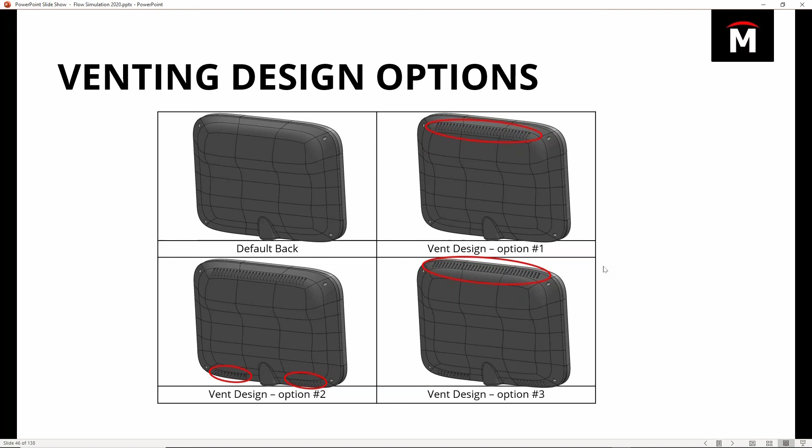And then of course I think kind of an obvious thing would be put some vents on the bottom as well, so that we have somewhere for air to come in, wash over the board, and come out of the top. That'd be the best way to go. Do we really need to put those vents on the very top surface or not? Well, that's not hard for us to find out. We'll just make a configuration where they're located right there, little linear pattern of them, and find out. So that's what I've done. I've taken these and just cloned my study 3 times to each one of those configurations.

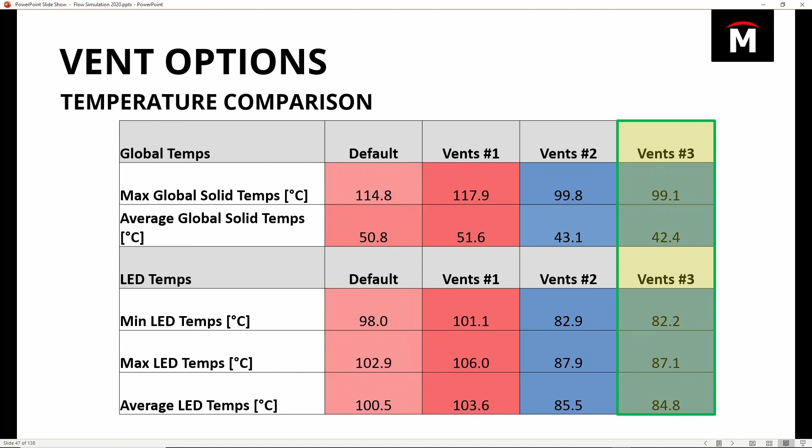Use that batch run to run these things to figure out which one is going to be the coolest. And as you probably guessed, that third option, vents at the bottom and vents on the very top, is going to give me the lowest temperature. It's not a huge difference from having those vents right off the top. So I feel like I could really choose either one of those options to move forward with.

And of course, I've got the reports to prove this, and I've got the visuals and animations to show other people. In fact, if you're doing any simulation, it's not a bad time to think about photo rendering and visualize, or moving on to even VR, extended reality type approaches to show other people what the design is going to be, especially with all of these cool colors and animations.

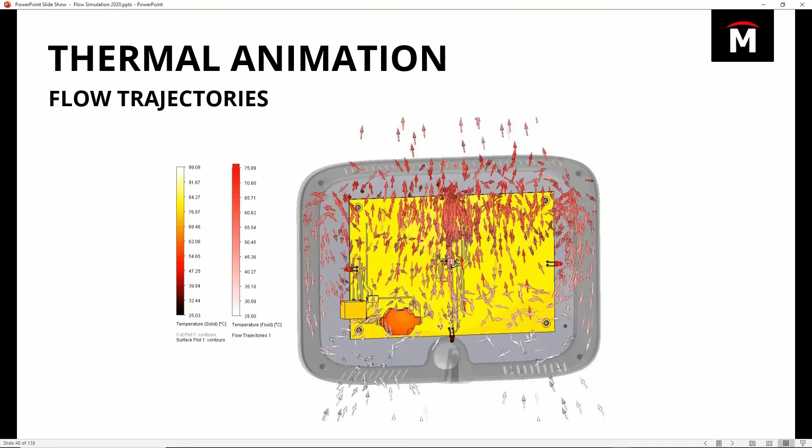So flow simulation can obviously do a lot. I was only able to show you here maybe 2 of them inside these 45 minutes that I used so far, just to talk about general airflow, how to set one of those up, and then of course thermal analysis, which I think electronics are likely to have the most components in them. So I wanted to bring that up. But there is just a wide range of applications.

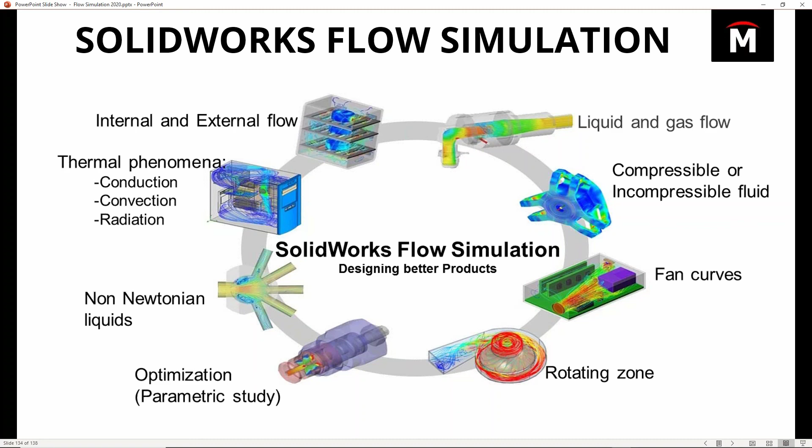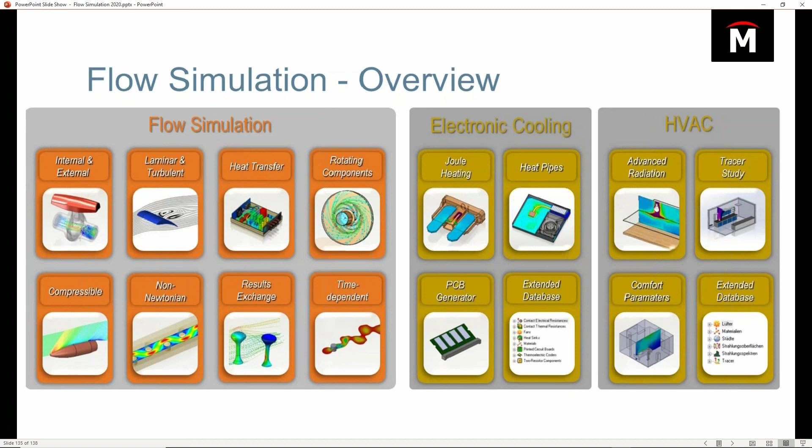And basically everything that you see here is included inside of the one license that's called Flow Simulation. Right? You have to have a SOLIDWORKS license to run this stuff. It runs inside of SOLIDWORKS, and then you buy Flow Simulation, and it does just about everything I've shown you here, but there are 2 extensions you can buy. Now, these aren't whole new licenses. They're really just extensions, a little bit of the functionality, a bit of the databases.

The first one being electronics cooling. Now, of course, I can do electronics cooling with just the Flow Simulation license. I can learn a ton about it just with that. But there's a few things you should know about if you are doing a lot of electronic stuff. One of them is that 2 resistor model you saw me use. It's really good for integrated circuits. Anything where you do have a junction or a board temperature, the equations for that model are in this module. Heat pipes as well.

If you're using heat pipes, or if you want this more accurate PCB generator that you saw me open up, so you can put in the number of layers and their copper coverage. You can definitely still just go with a single material or an anisotropic material for PCB, but it's nice to have that extra layer of accuracy. Or the equations involved with Joule heating, right? If I want to put an actual current through some traces, if I want to see if my circuit is going to burn up or have a short, or if I'm going to burn through some sort of relay, you can do this with Joule heating.

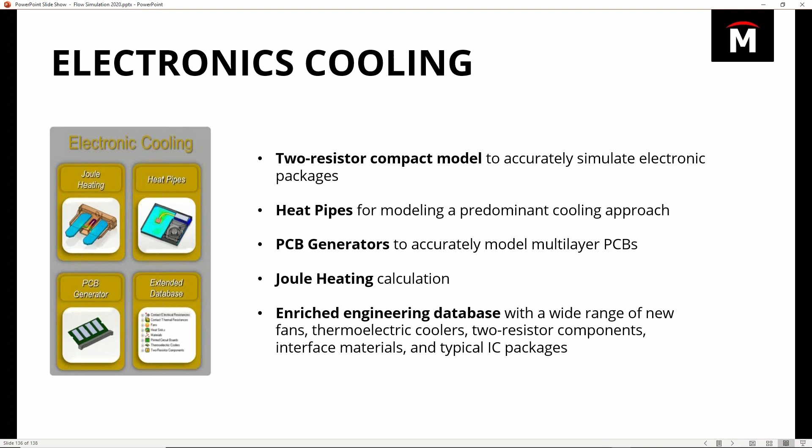And then finally, that enriched database. So you're going to have more fans right out of the box, more materials right out of the box. Of course, you can enter those. You can create your own custom fans, go to your manufacturer and get your fan curve and just copy and paste it in there. But it certainly is nice to have that database.

The second way to extend functionality is with the HVAC module. And this really is designed initially for HVAC systems. You're setting up a hospital, you're setting up a bus, and you need to figure out what the humidities are going to be and calculate these human comfort factors that you might use against different regulations like OSHA regulations to prove that, hey, if we put this design in, we're going to have the appropriate humidity and temperatures in these different areas of the building.

But really what I see a lot here is the advanced radiation model. So if you really want to take into account the spectrum of light for radiation, that's a reason to go here. Maybe you're doing a light box that has some transparent materials in it. Maybe you're doing an industrial grow light that changes colors. Maybe you're dealing with something in outer space where radiation is a big deal, some satellites. We have customers doing all of these things that actually use the HVAC module for it.

And tracer studies are nice as well. They can really help figure out the amount of concentration or the amount of an adjunct that is picked up by a carrier fluid. Not to mention the enriched database that comes with this as well.